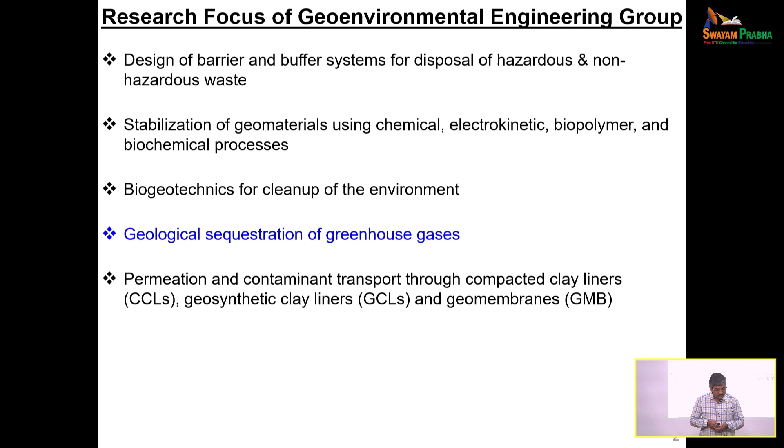Further, we also study permeation of contaminants through compacted clay liners or geosynthetic clay liners, and contaminant transport through high density polyethylene geomembranes. So this is the basic overview of my work at IIT Madras. I will dwell on individual things later on.

First, let us focus on the geological sequestration of carbon dioxide or greenhouse gases. In this particular case, we only talk about carbon dioxide. Now, what is of primary importance? You have so much to do when you are talking about greenhouse gas mitigation. There are various techniques you can apply at a small scale level.

But all these techniques existing at this point of time may not be able to address what we emit 100%. So one such way is, as a geological engineer or maybe as a geoengineer, can we capture the carbon dioxide at the source, transport it to a suitable site, and dispose it into the underground deep geological media? This is one way of doing this.

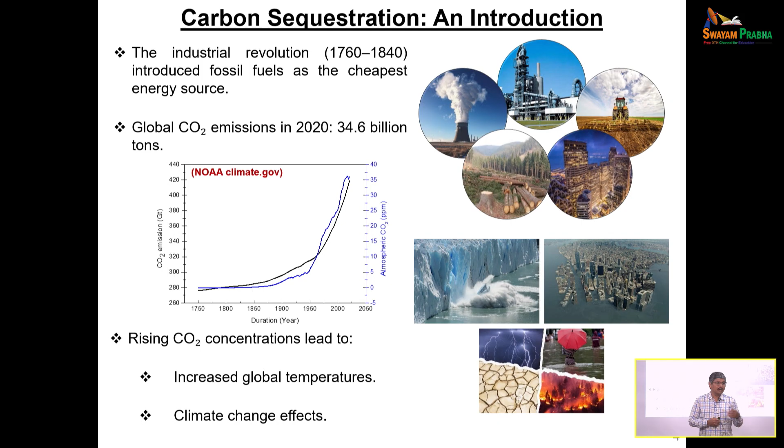The second option is maybe the last option: geologically, can we store them for a long period? It may not be a permanent solution; I don't want to say that it is a permanent solution. Till you have a solution which can be implemented at large scale, can we store this entire carbon dioxide into the deep geological media, for example a sedimentary basin or a saline aquifer which is not really useful? I am talking about 500 meters to 1 kilometer below the ground surface.

Alright. If you are pumping in such a scenario, what is going to happen? We need to understand the kind of layering system from the top to the bottom. Even if you are disposing at that particular depth, there is no guarantee that it will stay there. It will escape through the fractures, through so many other pathways. And finally, whatever you are supposed to mitigate, you are not really addressing the problem.

Now, if this is the scenario, we want to understand how best we can use a certain sink media to dispose the carbon dioxide, how the gas is going to interact in those conditions, and how we can ensure there is no possibility of leakage. Some people say that if you do that, there may be a possibility of tremors, earthquakes, the entire thing collapsing, and so many other issues. Can we demonstrate this scientifically or not? This is basically what we wish to do.

As I mentioned earlier, among all other techniques, we want to take the carbon dioxide from the source and then put it down below into the geological media, 500 to 600 meters or maybe at least 1 kilometer down below, where the groundwater at that particular location is probably saline in nature. You are not really spoiling any groundwater.

Now, if you look back, what happens to this one? This is the reservoir. From the scale point of view, tens of kilometers, maybe the reservoir may be thousands of kilometers. Just schematically I have shown here. On top of that, there are different layers. If you can see this one, there is one kind of a cap rock. Then there may be an intermittent layer as well, and then cap rock.

Cap rock means whatever layer is sitting above the reservoir, which is able to provide containment to this particular system. This cap rock is no more intact, like a solid steel kind of plate. Don't really imagine that. It will have fractures, it will have faults, it will have so many other things. Now let us try to idealize the situation a little bit further.

Suppose in this kind of scenario you are disposing through this injection well here. If there is a fracture, it will migrate up to this point. If there is another fracture, it will migrate up to this point, it will further migrate and just keep going. But these fractures are not just simple tiny voids, not just an opening where it is escaping through. These gaps are also filled with certain types of geological materials.

Let us imagine these kinds of gaps are the cap rocks. The majority of the cap rocks are made up of shale. Then if you look back, the mineralogical composition of that kind of material is basically clay type soil. The clay minerals may be 60 to 70%. The remaining may be non-clay minerals, something like quartz, which is very inactive. Fundamentally, what really happens when the gas is interacting with the clay type minerals and non-clay type minerals? Is there any difference fundamentally?

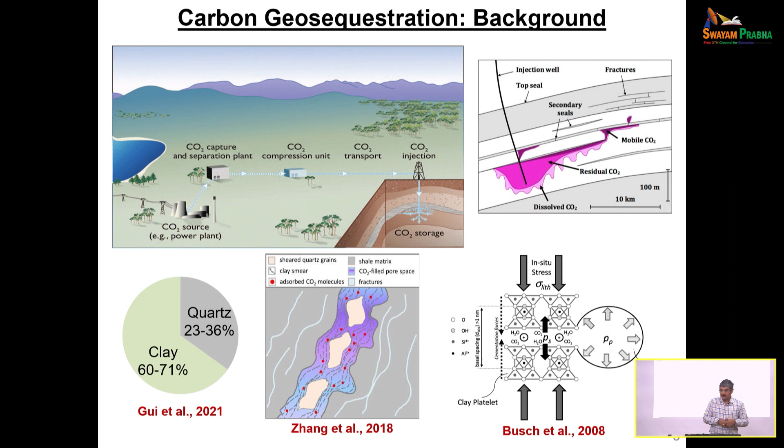But it is not only that. If it keeps on expanding, what will happen? It also exerts a lot of pressure on the entire fault. If it is exerting a lot of pressure and crossing the threshold value, eventually it will fail. We don't want to see such a scenario. So the overall idea is, can we strategically adopt the injection strategy so that we don't encounter such a scenario?

In order to do this, we should have two things. One is the adsorption ability of this kind of clay mineral, and then the resulting swelling: how much change in the stress, and whether this stress is causing any kind of failure or not. So experimentally you measure something, and you have to build a numerical model accommodating all this hydromechanical behavior in a coupled way; only then can you do a little bit of justice to this. So when you are trying to do that, the first part is, we try to assess.

Imagine that this is also again another hypothetical situation. Most of the shales may have some amount of the 2:1 minerals. Suppose these 2:1 minerals also may have different exchangeable cations in their position. In the laboratory, we try to simulate the same condition. We try to homoionize the clay with sodium as an exchangeable ion, potassium as well as calcium.

The specific surface area has been measured by using the BET method. Then we know their hydrated radius. The ionic potential is basically the ratio of the valency to the hydrated radius. Does it have any impact on the adsorption capacity or not?

Alright. But when you want to really measure the adsorption capacity of a given clay, we need to initially degas the clay in an equipment. You need to preheat it. Whether the preheating can be done at 200 degrees or 300 degrees or 400 degrees, that we cannot decide randomly. Rather, let us try to get their thermal decomposition profile by using a TGA. Then you look at it, there is a peak here, another peak, third peak, fourth peak.

If you look at it, the first peak represents the free water; bound water leaves the clay material when you heat it in the range of 180 to 200 degrees. If you go further, strongly bound water will go. If you go further, the clay itself will decompose beyond a certain point. So we don't want to disturb the structure of the clay.

Our intention is to really get away the bound water, so that we will understand the material's behavior a little better, so that we don't complicate the presence or absence of water. So then we understand the degassing temperature is very close to 150 to 180 degrees. That part we have done.

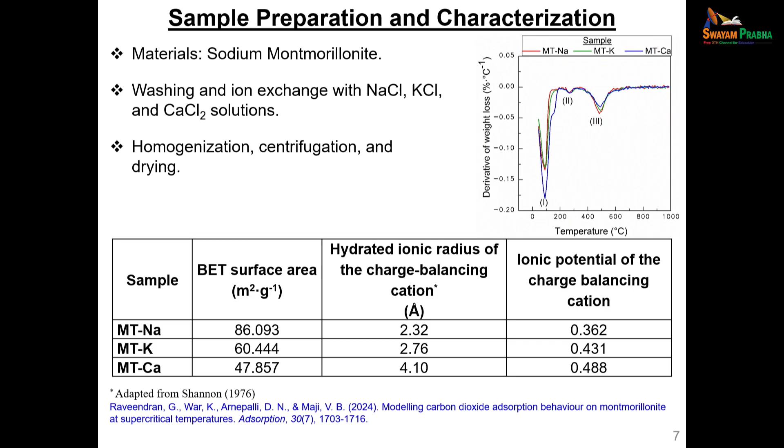After doing this, we bring the sample to the high pressure gas analyzer. It is a very small tiny equipment where you place the specimen, degas it to the desired level, then you inject the CO2 at different pressures. Then you measure how much gets adsorbed. In this entire process, you will only get an experimentally measured adsorption capacity. This is called the excess adsorption capacity.

Then we see this for different clay type materials, over a different range of temperatures. One thing is very clear, the excess adsorption is going to change the moment you change the type of the exchangeable ion. It is also changing with respect to the temperature. Right? This is because the interlayer cation type basically decides the adsorption value.

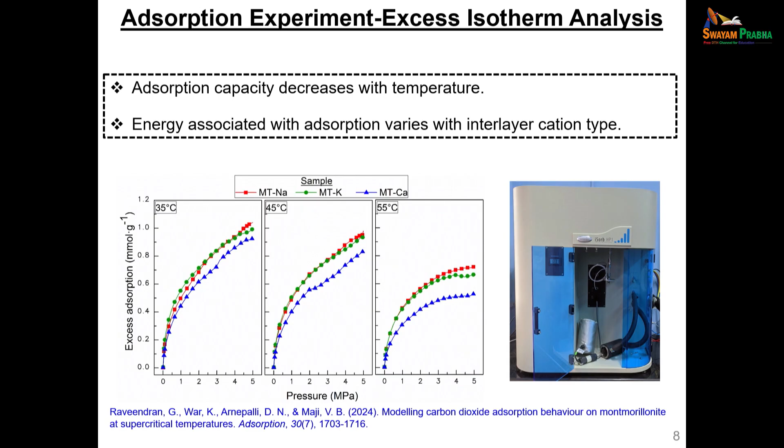Once you know this, are we able to model this by using any one of the theoretical models? For this purpose, we use the Ono-Kondo model. Then we back calculate the parameters: one is related to the capacity C, second one is related to the fluid-solid energy parameter EFS. Then we compare with respect to the BET or ionic potential, what I have shown earlier, and we also see how these vary with temperature. We validated this data using experimentally measured or reported values in the literature.

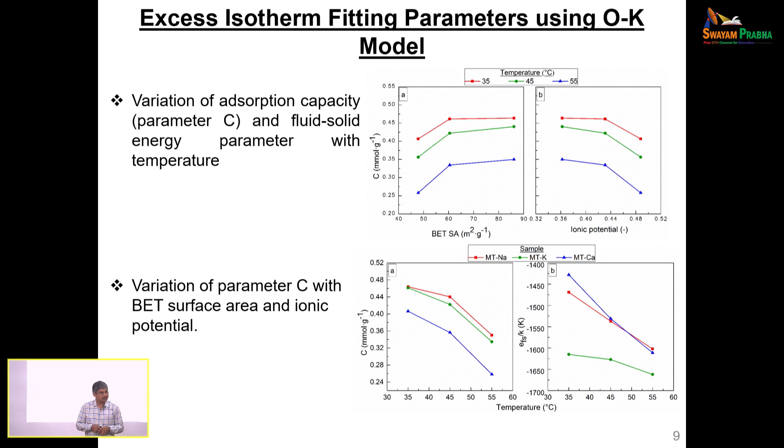Once you have done this, you are pretty much sure about your measurements by using the high pressure sorption analyzer. After doing that, the excess isotherm is not a really good term to capture, because that's not a true representative. You need to convert this experimentally measured excess isotherm into the absolute isotherm so that your modeling can be better.

In order to do this, we have to assume the density of this adsorbed fluid. Then we vary with different concepts, whether the reciprocal of the van der Waals, the liquid density approximation or the critical density approximation. You compare with the experimentally measured value, and see which particular concept is better.

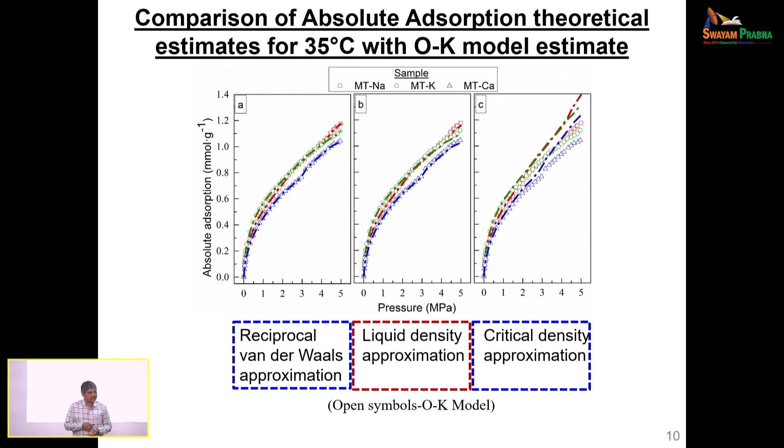Further, we observe the absolute isotherm estimated by using various theoretical models. For example, in this case a Langmuir fit I did, and the second one is a DA fit. Is Langmuir able to really fit over a range of pressures? The answer may be no.

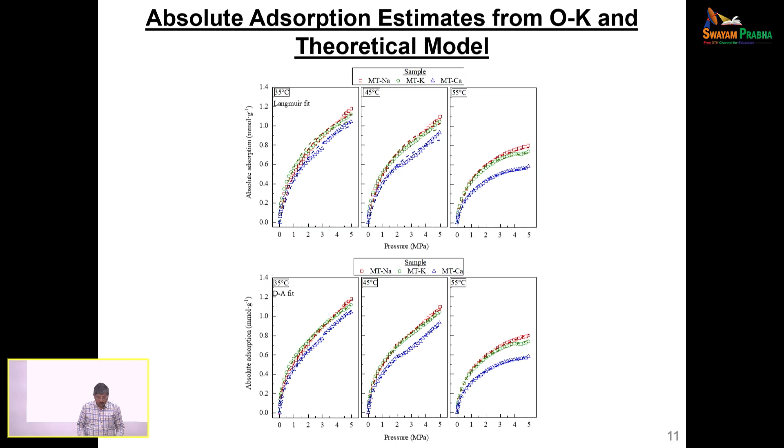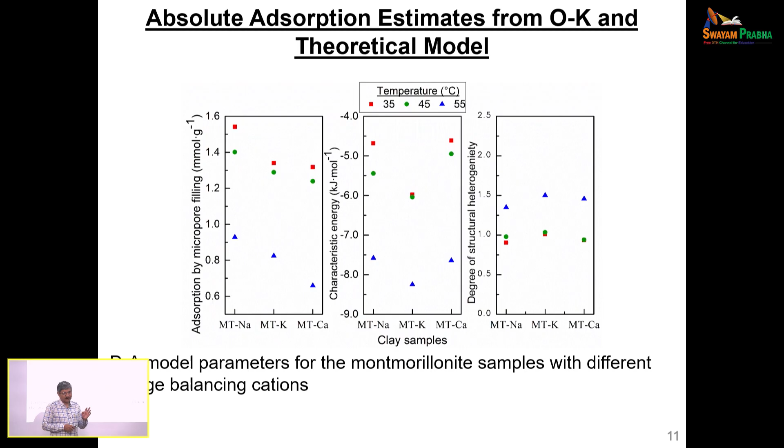Otherwise you have to really go for another model, which is basically the DA fit. By doing this, finally we got some of the terms related to how much adsorption is by micropore filling, what is the characteristic energy, and so many other things we tried to capture for different clays over different temperatures. This part is done.

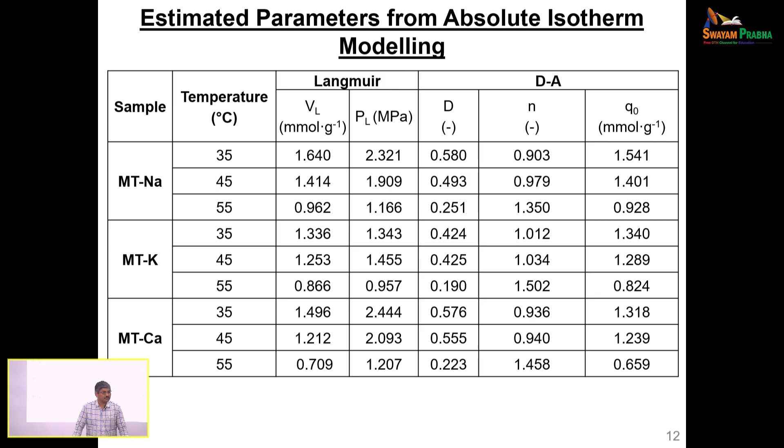After doing this, this is what exactly you will have at the end of part 1. So now we capture the adsorption behavior of the material over a range of temperatures or a range of pressures what we anticipate in geological sequestration. Now how to take this information into carbon dioxide sequestration in geological media? Are we able to develop a mathematical model or not? That's the basic idea.

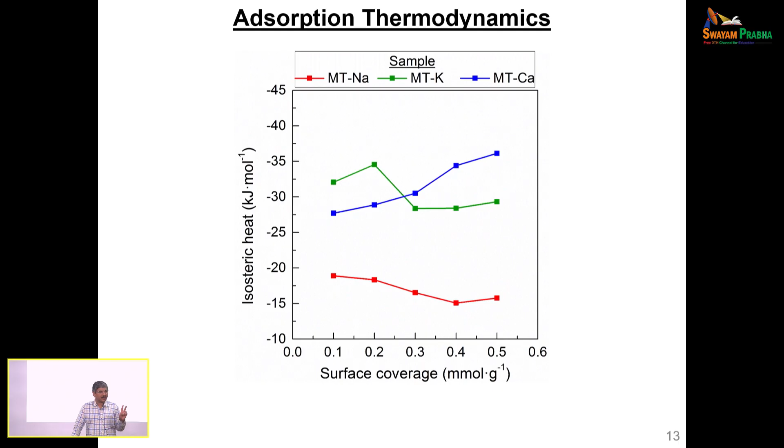Now the second one, the isosteric heat also we try to compare, so that it can say whether it is physisorption or chemisorption. So predominantly for the material what we consider it is only physisorption. Double layer adsorption happened. So we were able to capture the entire phenomena in a very neat and clean way.

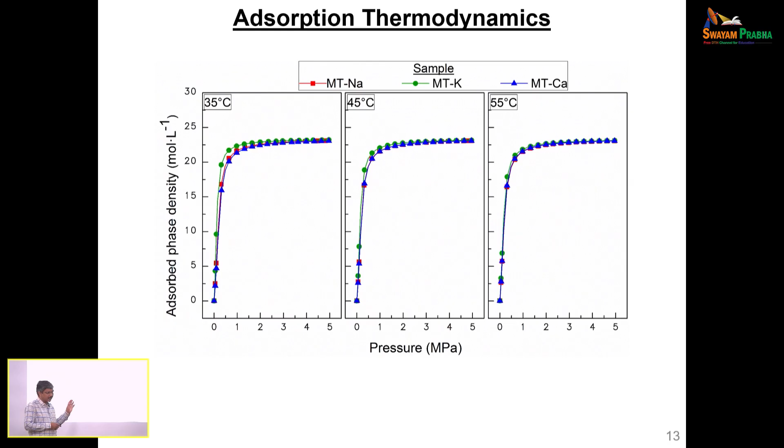So this is basically how the adsorbed phase density is varying with respect to pressure, as you know. That's one of the difficulties, why we could not really use the excess sorption isotherm, because this is varying. So with this we try to capture the absolute isotherm for a given type of material. This is one way of looking at it.

The next part has to do with this. Can we take the carbon dioxide into the deep geological media? Now the clay is filled in the fault. If it is exposed to different pressures and temperatures, how is it really going to respond? Let us try to understand that. Imagine that there is only pure clay, or maybe pure clay and quartz, in a dry state. When you expose this kind of system to high pressure CO2, possibly two things can happen.

As I told you, because of the adsorption of CO2 on the clay mineral, swelling takes place. If you don't allow the swelling to freely happen, strain will develop. Once straining of the material happens, stress is going to develop. If the increase in stress causes a failure, then it may fail by two mechanisms: one is by shear, the second one is by hydrofracture. So these two things we need to capture very clearly.

For this purpose, three mathematical models were developed by Kumba, which I am going to present here. One is the volume expansion of the clay mineral itself, which will take place upon adsorption. Now between the clay minerals there is a pore. You are pumping the gas at such a high pressure, so there is a poroelastic strain as well. That will try to compress the particle; the other will try to expand the particle. These two counteracting phenomena will finally change the porosity of the material.

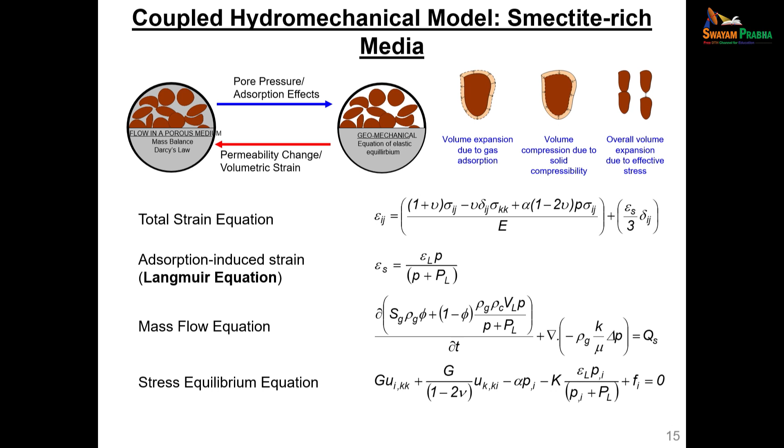Nothing more than that. Now with this, if you can solve these equations using a Langmuir isotherm for the swelling or adsorption phenomena, then you may get some variation. Before taking the model further, we calibrated the model using the experimental data reported by Zhang. What he reported is something called swelling pressure. The second one is the pore pressure.

Both, we try to calibrate our model. This is the experimental data by Zhang. These are basically by our numerical model. After doing this, if you look at this particular entire data, now this is where the injection happens.

This is a reservoir, this is a cap rock, where the cap rock is having some kind of a fault or whatever it may be. It may escape through this. We are trying to model this zone. Now if you look at this particular zone, different stress state conditions may prevail there. One is, for example, completely confined.

That means that swelling is happening, but you don't allow the clay to change its dimension. You are constraining. That's one possible way. That means that at a greater depth of 500 to 600 meters down below, you will have a confining effect.

The second one is possibly a free condition, that the clay can freely swell. There are no constraints. So that's why on the side we put a roller. The injection is happening at the bottom. The top will try to swell freely without having any constraint. The third one may be in between both of them.

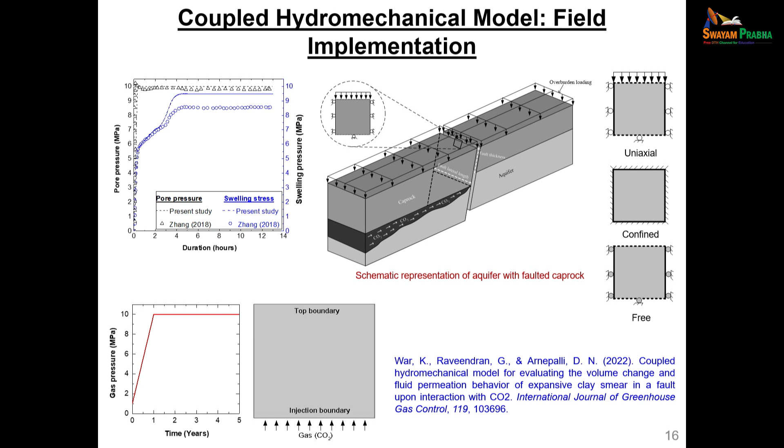When you are looking at this particular one, the first one you see is with adsorption induced strain. That means swelling is considered, adsorption is happening, swelling is happening. In this case, there is no swelling. I just want to compare with swelling and without swelling. That means this is only the poroelastic strain. These are basically a combination of both.

One thing is very, very clear: the change in porosity and permeability ratio. So the porosity variation we captured, we try to correlate in terms of the cubic term with the permeability value. So this is very clear under confining conditions. The permeability ratio variation is not too much, because you are not allowing the clay to expand too much, you are constraining.

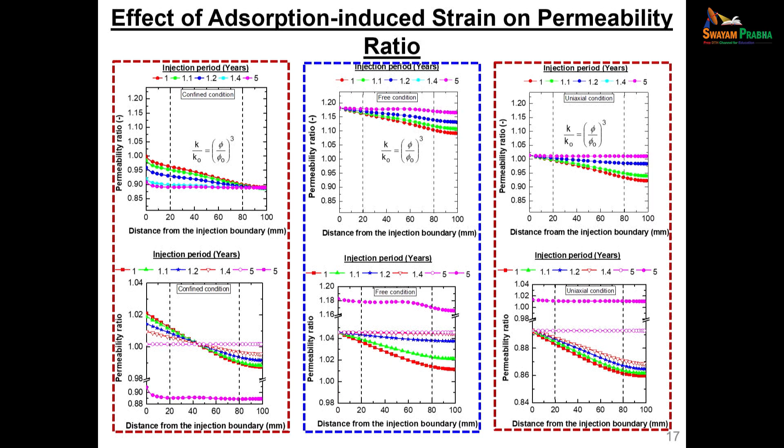Then, as a result of the swelling, the changes due to the poroelastic effect as well as the adsorption strain induced effect may get counterbalanced equally. That is one scenario. Another scenario is a free condition. Completely allowed freely, the permeability ratio changed drastically by almost 20%. When permeability changes by 20%, the escape rate is very high. Let us try to see the impact of all these things and capture it in terms of this one.

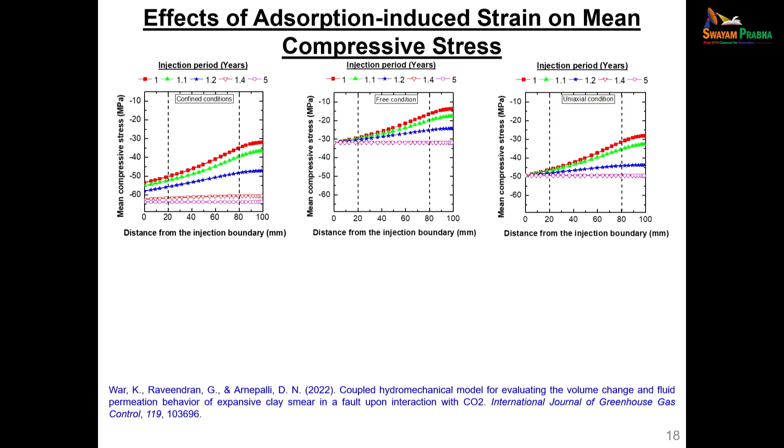Our ultimate goal is to see how the permeability is varying. The second goal is to see the change in stresses due to the poroelastic effect as well as the adsorption induced strain effect. Can we capture the change in compressive stresses? The compressive stresses also vary depending on the kind of condition you impose. If you are imposing a confined condition, there is a lot of change. That means potentially you are moving from the existing equilibrium condition towards failure, or maybe not.

So with this we have closed the first model, validated the model, that's perfectly alright. But the problem with the Langmuir isotherm is it only represents the adsorption behavior over a small range of pressures. In general, in the field, you pump the gas at a supercritical state, and the Langmuir isotherm may not capture the entire phenomena, because fundamentally the volumetric strain, or adsorption for that matter, increases, reaches a peak value, and thereafter decreases.

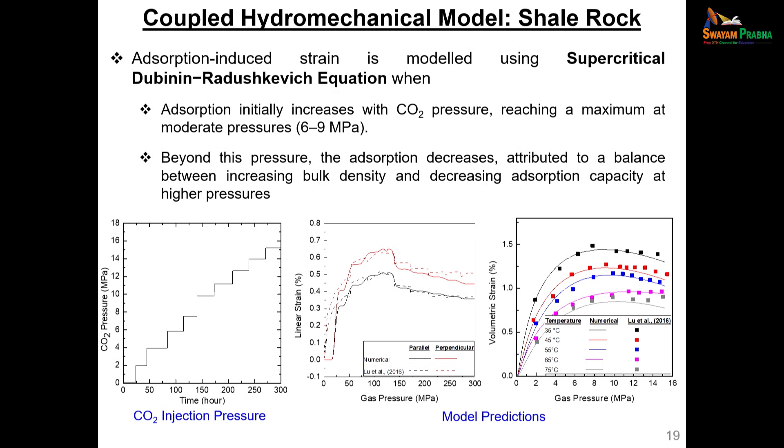Then what we did is adopt a field scale study, where people pumped in the gas at different pressures in a step function, let it reach equilibrium, and kept increasing. Then we captured the linear strain using our model, as well as the volumetric strains. So with this, we could validate our model even for the field level representation. Now, by doing this, can we take the model a little bit further?

Can we say that the change in porosity, the change in compressive stresses, will lead to failure or not? That's the basic question. For that matter, Rutqvist proposed two hypotheses. The first one is shear failure. The second one is hydraulic fracture failure.

He gave the condition: if the pressure developed within the system is compared with respect to the critical pressure, the pressure margin, PSM, is pressure minus critical pressure. Whenever it becomes negative, it is safe. That means your pressure is lower than the critical pressure, it is safe. Whenever it becomes positive, it is unsafe. Unsafe doesn't mean that you are really going to fail everything. Just don't take it as a direct conclusion, right? So these are the two ways to get these two things.

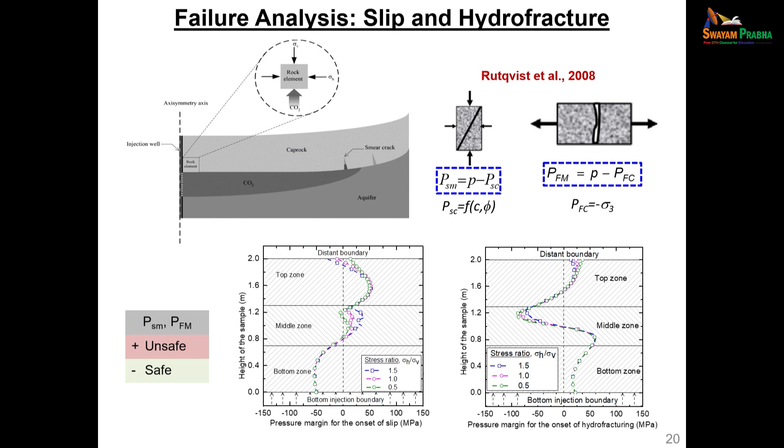Now with this, there are two things. One is for the onset of slip. The second one is for this one. These are shear failure, and this is hydraulic fracturing. So the two are independent phenomena by which the material can fail. But the story here is, in the slip, the top zone is more vulnerable than the bottom zone. But for this one, because the gas has to migrate all the way up, it will take a lot of time. So with respect to time, it's not really happening. In this way, we were able to capture the variation of stresses within the system, whether it leads to failure or not.

Further, we also considered that at different depths the initial stress state may not be the same, meaning the vertical overburden pressure sigma V in this direction and the sigma H acting in the other direction may vary. We considered the ratio of these two stresses and varied it numerically. Can we capture the phenomena? Do we see an entirely different scenario? We looked at both hydrofracturing and the other one very clearly. With this, we saw that the behavior is more or less the same. Nothing much is really going to happen.

Can we take this model a little bit further? Can you introduce into this model a two-phase system, where your clay is not only in dry condition interacting with the CO2? You can also introduce some moisture into the system, which is in general possible. It may not be a fully saturated condition, but there may be 1 or 2 molecular layers, or 4 or 10 molecular layers of water. The previous model is not able to capture that phenomenon. Now we modified that behavior by incorporating 2 additional terms.

How? The moment you introduce the second phase, capillarity comes into the picture. When capillarity is there, it induces suction. That means when you are pumping gas into a partially saturated medium, it will drive the moisture out of the system. When you drive out the moisture, shrinkage of the specimen will take place. That's one possible phenomenon. Second, when you push the gas into the system, adsorption will also take place and swelling will happen. Both shrinkage and swelling can happen side by side, and they can be captured by these two terms.

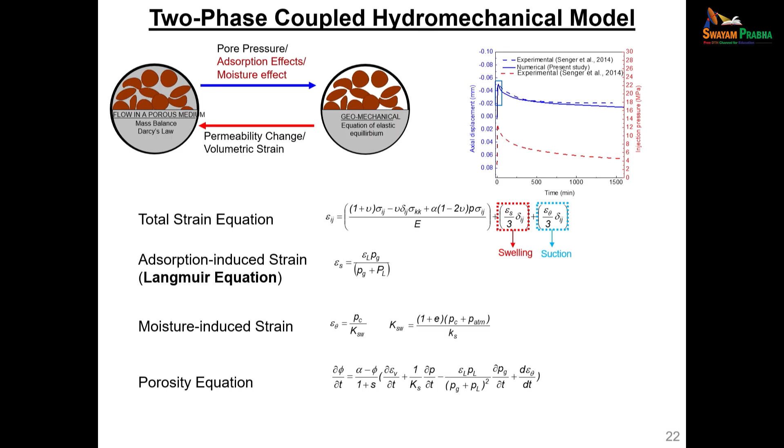Again, we went to the original governing equations. We altered these equations in order to capture the multi-phase system. Not multi, it's a two-phase system. Let me not boast it too much. With that, let us see how the injection strategy works if you follow this particular fashion.

Anyway, injection doesn't mean that we will suddenly impose 50 bar. We will slowly, incrementally go. In any injection strategy we try to follow, we maintain certain days. This is also as per one of the field site data we have taken. Then we try to impose it. A to B we increase, B to C we maintain constant.

Then slowly we increase. Now, if you look at whether the material is going to fail or not, in civil engineering terms, mostly we try to consider it in terms of the deviatoric stress. If the deviatoric stress variation is too much, it may lead to failure. If the deviatoric stress is in general reducing, then it may not lead to failure.

If you look at it clearly, from A to B, as injection started, it increased. Whether it's touching the threshold value or not, we are not really talking about at this point of time. Then B to C, when the relaxation happened, again it came back. Then again it increased. So overall, we know how to capture the deviatoric stress variation.

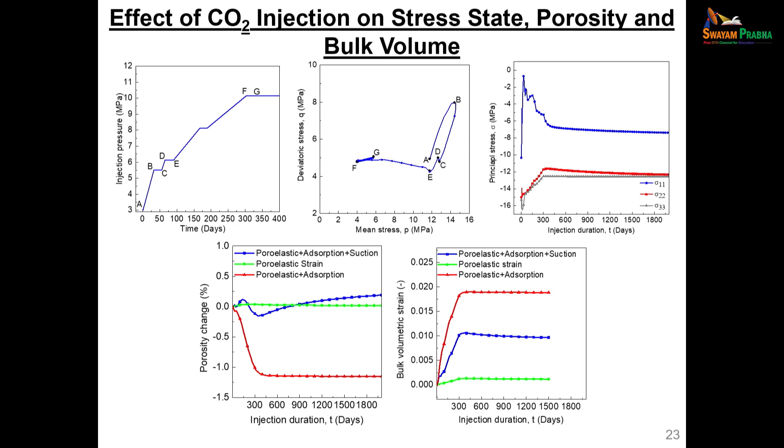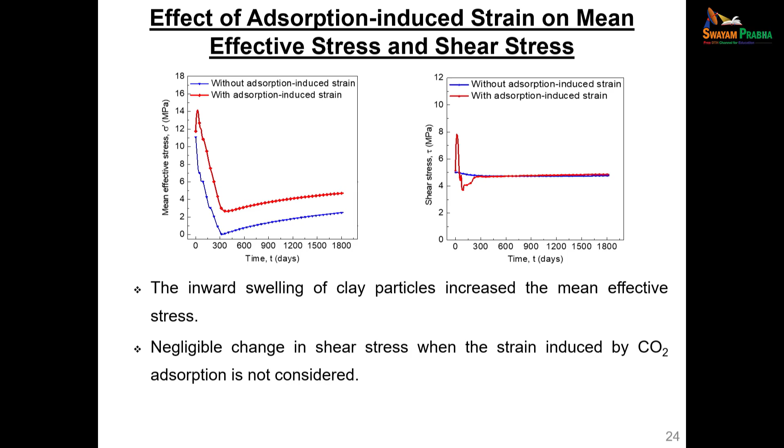Now with this, what Kumbha proposed is various different injection strategies, whether the injection strategy is so quick or so slow, or what should be done. So he finally came up with a set of injection strategies where we don't really introduce any kind of failure. Our idea is not to induce a failure. So with this, the mean effective stress variation and shear stress variation we try to see. This is the overall story of geological sequestration, in the limited way we did it.

In summary, let me try to put it, even though you might have already captured it very clearly. We all know that montmorillonite is a 2:1 smectite-based mineral. It is significantly influenced by what kind of cation is there in the exchangeable position. That part is very clear. Second thing is, we all know that the adsorption capacity decreases with increasing temperature. It also varies with the exchangeable ion as well.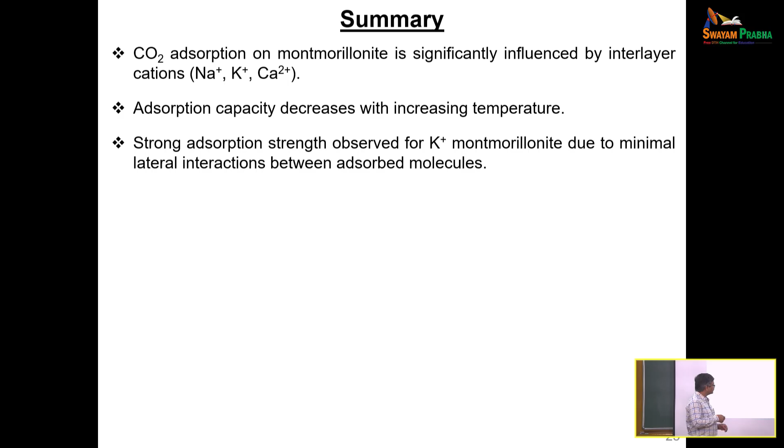In the case of a potassium-based exchangeable ion, a strong adsorption strength was observed due to the minimal lateral interaction between the adsorbed molecules. Anyway, we tried to assess the isotherm and model it using the Ono-Kondo model. That was really good, but the DA model was most accurate in capturing the absolute isotherm. So that's one thing. Temperature dependence we also tried to capture.

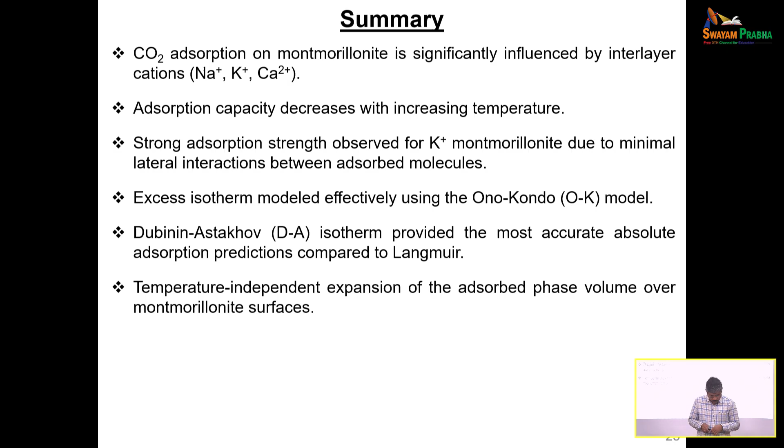We also know that based on the isosteric heat values, mostly less than 40 kilojoules per mole, it's basically physisorption. So it's a reversible phenomenon. There's no chemical adsorption as soon as you introduce CO2 into the system. Over a period of time, maybe some precipitation and dissolution mechanisms may induce chemical phenomena, but at this point of time, it's purely physisorption.

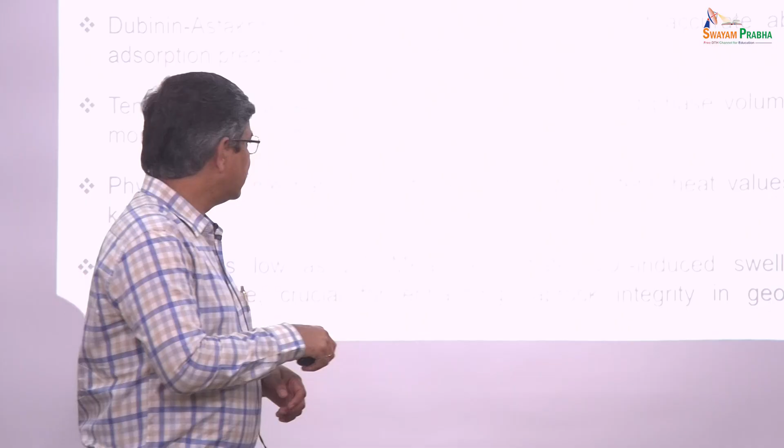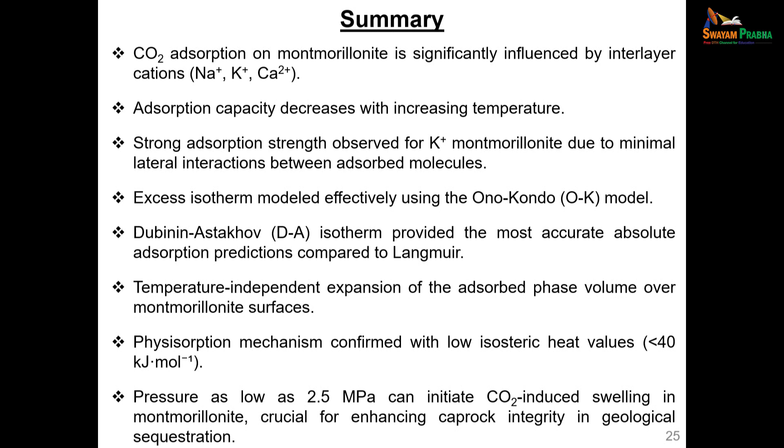Now, people ask me whether, when you introduce a gas at atmospheric level, the clay will swell. Answer is no. You need a minimum pressure of at least 2.5 megapascal to initiate the CO2-induced, adsorption-induced swelling, in the case of a monomolecular layer, what we have considered. So don't expect swelling of clays at atmospheric level. Otherwise, you may be thinking, what will happen to my building foundation because of the rise in CO2 concentration in the atmosphere? Nothing will happen to your building foundation. That much I can guarantee you, unless you really increase the pressure.

Overall, we try to capture the swelling behavior in the form of a strain, and that strain will alter the stress distribution. Primarily, permeability decreases when you are talking about a confined condition. That's good for you. That means whatever leaky path was there earlier gets closed. But in free and uniaxial conditions, of course, it will facilitate the migration of the gas, because you don't confine the system. It will swell, it will expand the void volume, and once the void volume is more, eventually the flow is more.

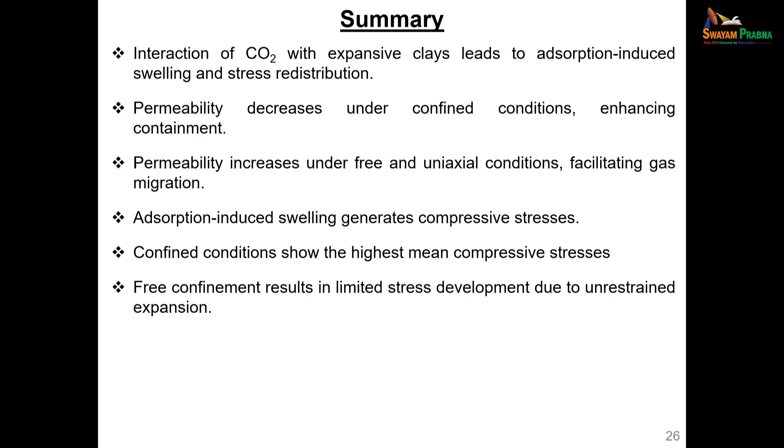So finally, adsorption-induced swelling generates compressive stresses under the confined condition, and from a permeability point of view the confined condition is good, but when you look at it from the deviatoric stress change point of view, it may be a little bit counterproductive. So overall, this is the story on geological sequestration of carbon dioxide, and what we as civil engineers are able to do.